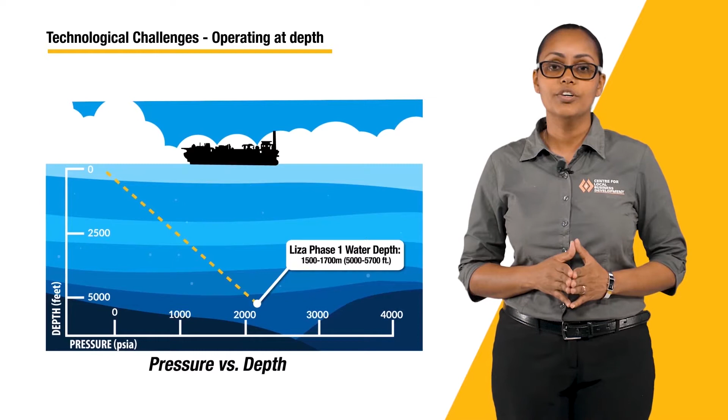At 5,000 feet deep, pressure is roughly equivalent to 2,100 pounds per square inch. Technological solutions include high-performance materials, high-pressure, high-temperature or HPHT pumps and valves. Machinery must also withstand extreme temperatures. Water temperatures at significant depths can drop to 0 degrees Celsius.

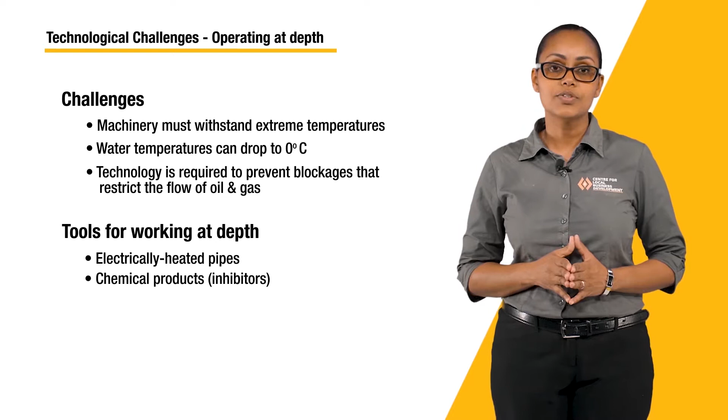Thus, additional technology is required to prevent blockages that restrict the flow of oil and gas. Such solutions include electrically heated pipes, chemical products called inhibitors, insulation, and high-performance materials. Conversely, downhole temperatures are very high and can reach over 100 degrees Celsius.

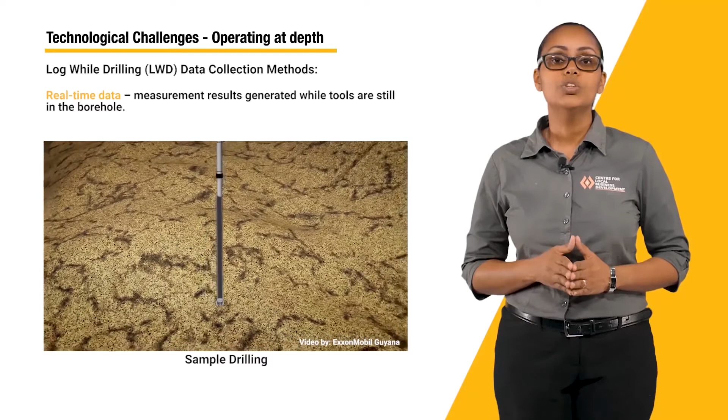The large distance between the surface and the seabed requires special technology to relay information and maintain equipment communications. Umbilical and log while drilling, or LWD, provide communication solutions in this environment. LWD tools work with measurements while drilling, or MWD systems, to transmit partial or complete measurement results to the surface while the tools are still in the borehole. This is called real-time data.

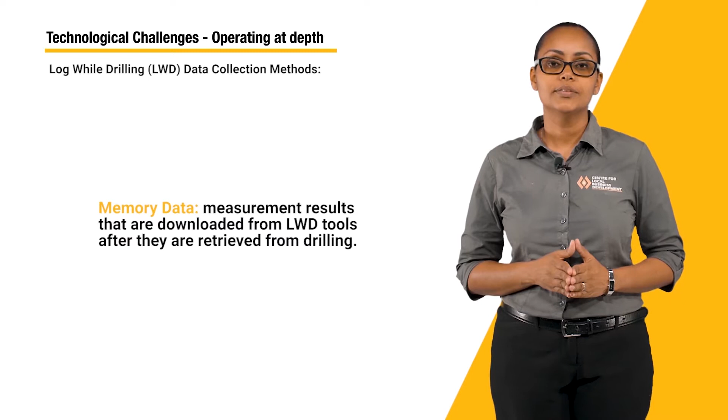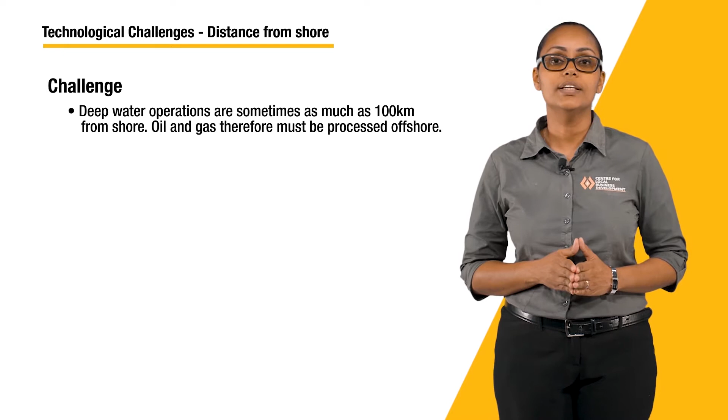Complete measurement results can be downloaded from LWD tools after they are pulled out of the hole, which is called memory data. Because deep water operations can take place at over 100 kilometers from shore, oil and gas cannot be transported to shore quickly and hence must be processed at the offshore site using FPSOs and subsea systems.

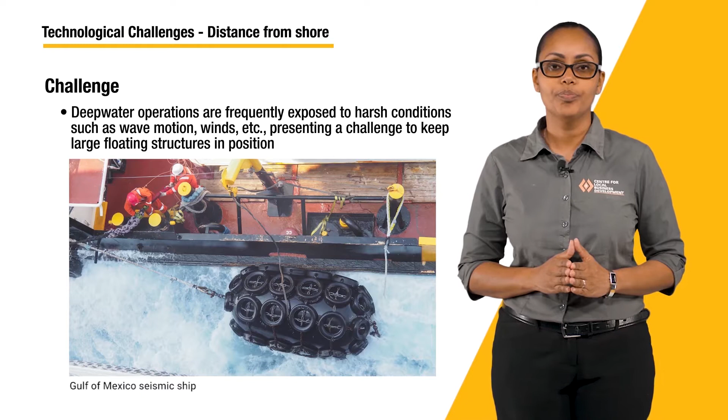Deepwater operations are frequently exposed to harsh conditions such as wave motion, winds, etc., presenting challenges to keep large floating structures in position. Positioning solutions include turret and mooring systems, anchoring, and dynamic positioning. Liza Phase 1 is 190 kilometers offshore of Guyana at a water depth of 1,500 to 1,700 meters, over 5,000 feet of water. The vessel has to remain in place for over 20 years, so systems must monitor waves and movement of the vessel.

Remember that the first thing we did in this course was to take a safety moment. In the offshore oil and gas industry, a culture of safety is very important since working in the offshore environment is a high-risk activity. To address the risk, personnel use personal protective equipment or PPE, and companies mandate safety training and safety management systems. Safety planning includes management of rescue resources offshore, medevac and firefighting systems.

These are trainings typical to the offshore industry that guard against the risk of working in the offshore environment. Common training you will find is Tropical Basic Offshore Safety Induction and Emergency Training, or TBOSIET. This includes Helicopter Underwater Escape Training, or HUET, Sea Survival and First Aid, Safety Induction, Firefighting and Self-Rescue.

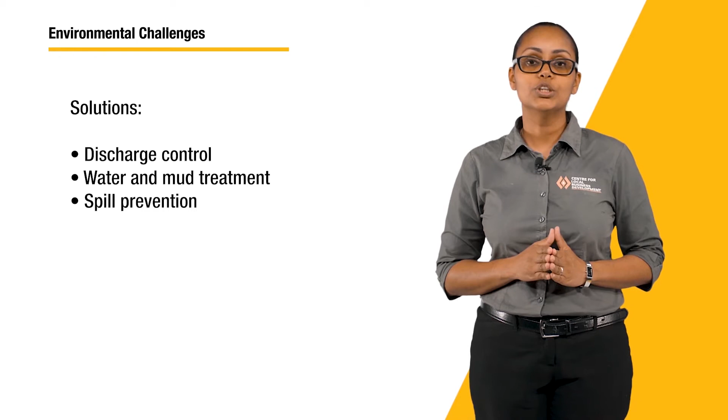To assess the anticipated environmental effects of a proposed project, operators also undertake environmental impact assessments, known as EIAs, as part of field development planning. While these are called environmental impact assessments, they also assess economic and social risk. Remember that the process for an EIA relies on data and surveys, which can include surveys from populations and stakeholders.

Throughout the earlier sections, we discussed some of the significant costs involved throughout the life of an oil and gas project. Here is a review of the major cost areas. Floating production facilities are a major cost component of offshore projects. Costs vary greatly depending on the type of facility and design, but an FPSO can cost over $1 billion.

This sample figure and others in this section are for an operation in the Gulf of Mexico and are in US dollars. Subsea systems also add significant costs to deepwater projects. Subsea systems include equipment such as umbilicals, flow lines, risers, manifolds, pipeline end terminations or PLETs, and pumps. An HPHT resistant subsea pump can cost around $300 million.

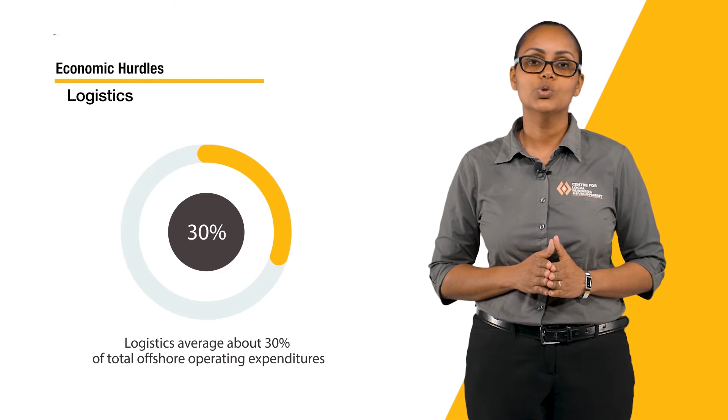In this session, we've covered the key challenges in the offshore oil and gas industry. These challenges include technological, health and safety, environmental, and cost. We also reviewed some of the efforts taken to prevent risk and manage these challenges, like equipment that meets industry standards and specifications, health and safety training that are common in the industry, environmental impact assessments which take into consideration social and environmental risk, and the magnitude of cost for key aspects of an upstream project.

So before we close this section, let's turn to some frequently asked questions from this section, some of which are a good review for what you have learned in the previous sections. Natasha, this section surely was very informative. In this section, we reviewed the main challenges of the offshore industry being health, safety, security, and environmental, technological, and costs. Throughout this course, people often ask, what are the operators doing to guard against potential environmental risks to Guyana's ecosystems?